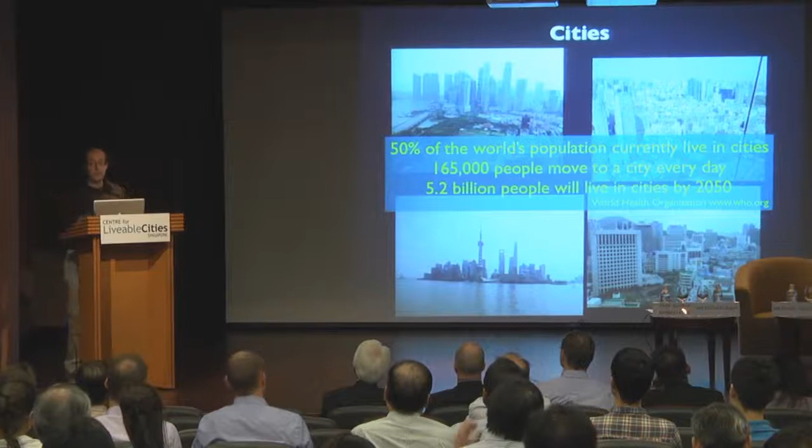That creates a lot of opportunities, of course, for growth, industrial and otherwise, that we would not have otherwise, but it also creates a lot of concerns. So I will be telling you today some ideas for how we can create technology to address this issue.

The analogy I would like to bring up is a bit of a cliche, but like every cliche, it has a bit of truth, and that is that a city is like a living organism. What does a living organism require?

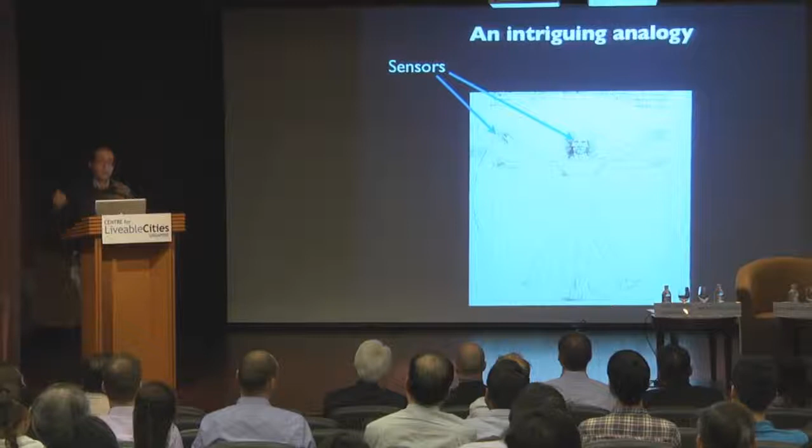Well, it requires sensors - all of us, we need to see, listen, smell our environment and so on. Then we have a number of actuators, the muscles in our body, which allow us to modify the environment and have interactions with fellow peers and other natural objects.

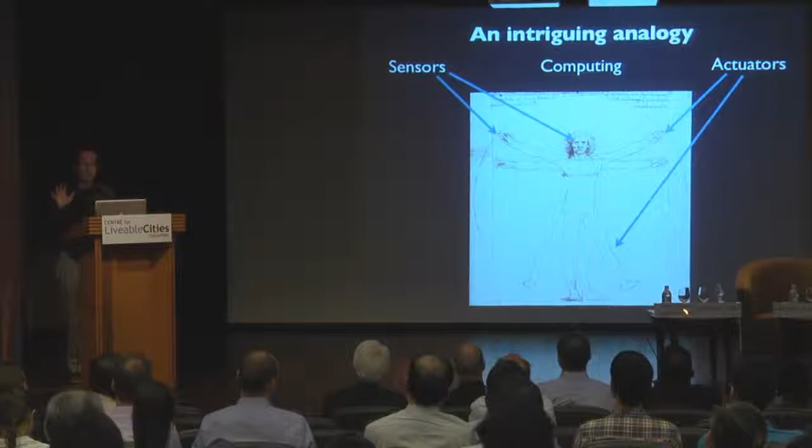And then finally we have a brain - a kind of computer which allows us to coordinate our memories and our current situation and decide how to act accordingly. Most of the time, it does not always succeed, right? But most of the time it does a good job.

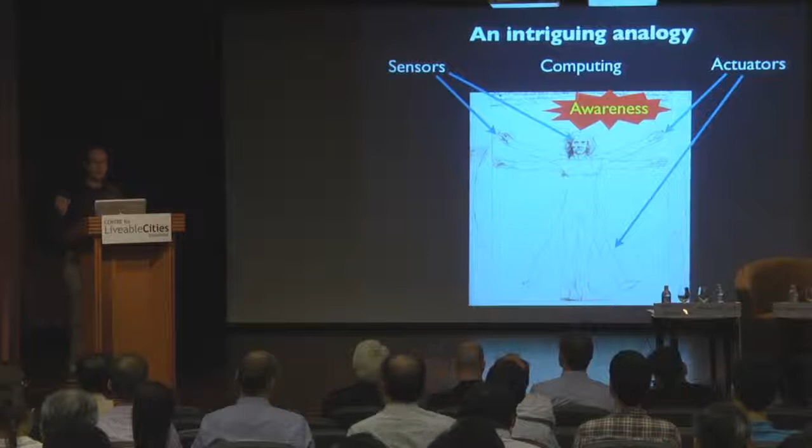And on top of that, you have to remember that we have limited resources because we cannot really compute everything. We receive a lot of inputs from our sensors, but we do not perhaps have enough computational power to deal with all of this.

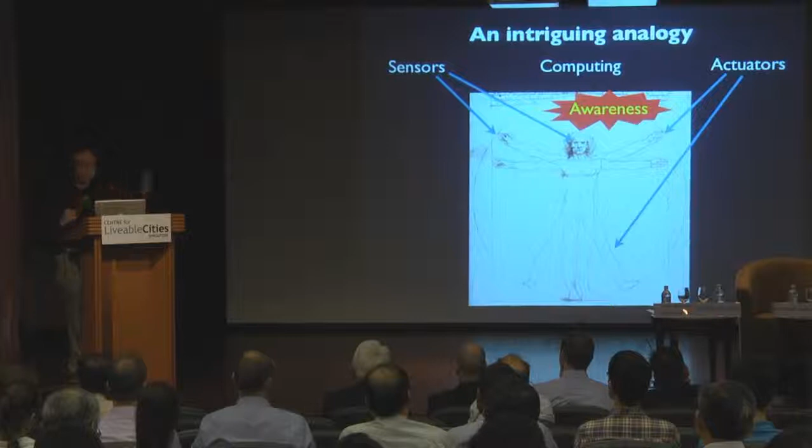Some of our actuations happen automatically, and some of them actually require the brain to happen. Sometimes you drive home from your office and remember nothing about the drive. You did it safely, followed all the rules, did not crash into other vehicles, but you remember nothing, right? That is because it was not sufficiently important to create a level of awareness. On the other hand, if someone cut you off on the way, you remember that, right?

So this is what I'm talking about. Your brain has mechanisms to allocate resources according to the current needs. It is very similar in the sense that, and of course much more complicated, it has sensors that monitor various aspects of what is happening. Some of those are related to traffic, some related to the environment, some to all kinds of things like water distribution, power, and so on.

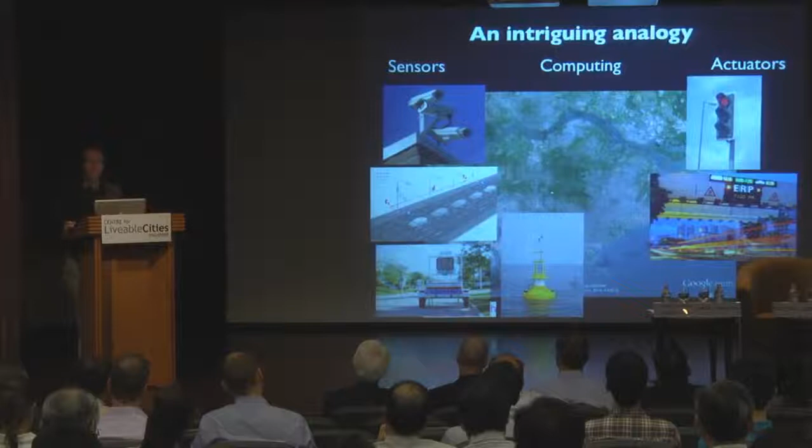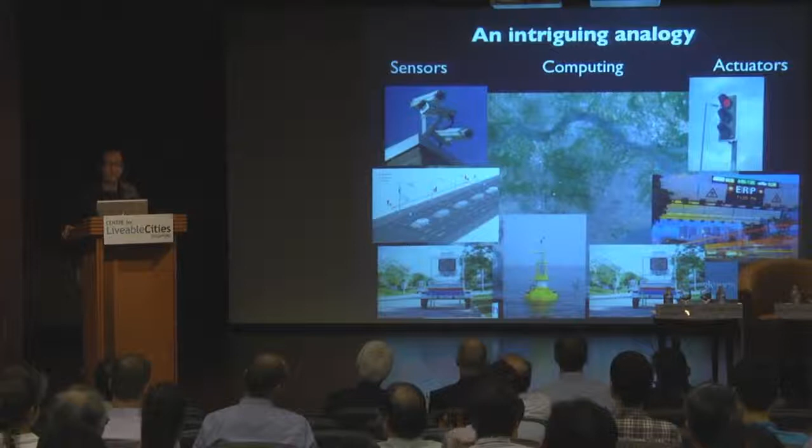The city planners also have ways to intervene with what's happening in the city. For example, a traffic light, in a way, is an actuator because it tells cars when to stop. The ERP that we have in Singapore is also an actuator because it indirectly controls traffic by making it pricier in some occasions to drive. That is one way you can limit traffic by making it expensive for people. Singapore was pioneering this, and then other cities, London and so on, adopted it. In a way, this kind of thing that measures your speed is also an actuator, because if you notice you're driving faster than the limit, it suggests there's a traffic cop nearby, so you better slow down. So there's many ways for city designers to intervene with what's happening.

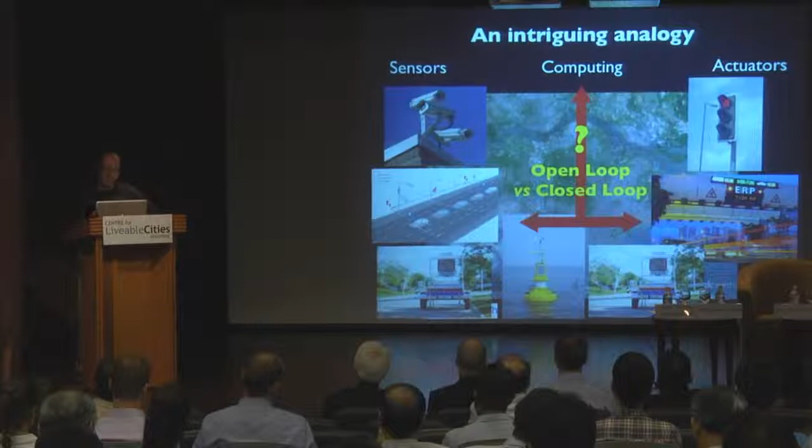What I would like to address is the issue of how you can make all of these things happen together, and this is, of course, an issue of computation. In the next few minutes, if you permit me, I will give you a very brief lecture on engineering.

A particular engineering approach is called closed-loop operation. Some of you may use it in everyday life, but I will make it a little more specific. In engineering, we always deal with systems. You can think of your body as a system, you can think of the city as a system, you can think of simpler things like your air conditioner at home as a system too. So what is a system? It is something that requires an input, and then it has a set of rules, and the output comes out as a result of the transformations that the rules apply on the input.

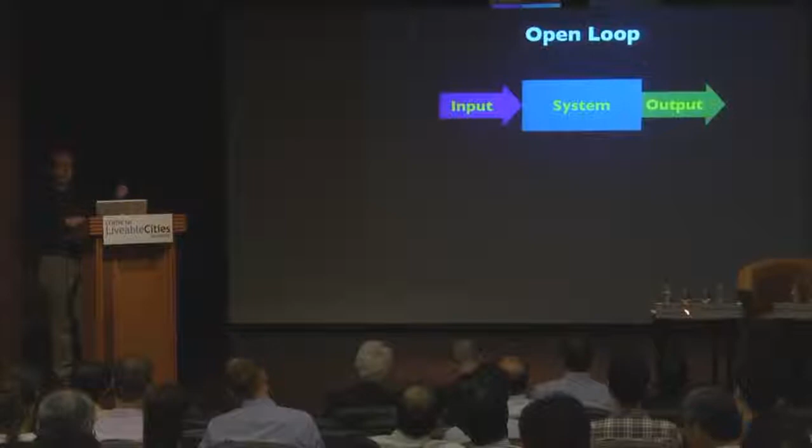When you have a system like this, where an input goes in and an output comes out, you call it open loop. An example is the toaster oven: you turn on the switch, the toaster oven has a timer, and then finally it says, okay, I'm done. The same is true of traffic lights — they operate on a timer, but they do not have a more intelligent way to interact with the output. So when the toaster oven is done, it has no way to know if the bagel has been overcooked or if it has not been cooked correctly. It just doesn't know. This is what we call an open loop system. It is cheap, and in many cases it works, but it is not always producing the desired results.

A better way to design systems, I would argue, is to do what is called a closed loop. A closed loop system is structured a little differently — you do not give it an input per se, you tell the system what you want the output to be. You want the bagel to be toasted at the appropriate level, for example, or you want the traffic in the city to be at an appropriate level, and anything that deviates from that level you do not find acceptable. This is your desired output, which you can think of as the input in this system configuration. Then you have another block here that is a sensor — it measures what the output is.

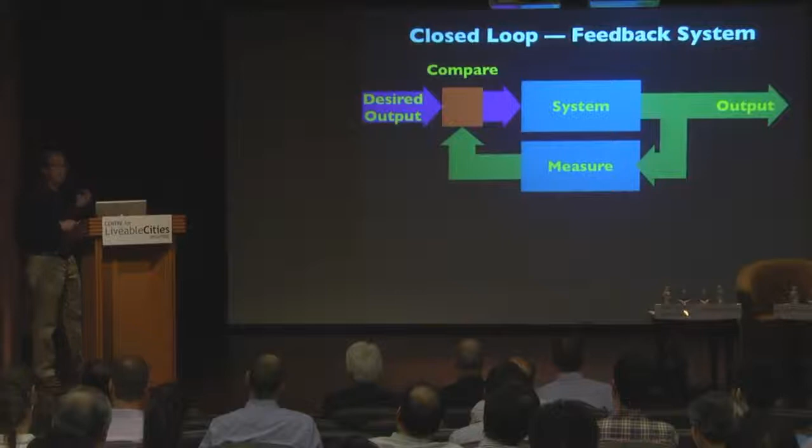And then what you do is you take the actual output of the system, you compare it somehow with the desired output, and then you tell the system how far am I from this desired output. If I am at the desired output, then you don't have to do anything, right? That's very cheap, because then you can coast and you are expending no energy. If you are far from the desired output, then you have to expend some effort in order to get closer. That is the idea of a feedback system.

And of course, there's a lot of mathematics and implementation details that go into it, which I will spare you. I'm not going to show a single equation. The air conditioner is a classic example of a feedback system because it does measure the temperature. So you set a desired temperature, and the air conditioner tries to match it.

That's the idea. The ERP is also a feedback system because the ERP sets the price, as far as I know - perhaps someone from the LTA can correct me - but the ERP actually takes the current state of traffic into account. If it is reaching a level that is perceived as too much, it will raise the price of the toll, so presumably some people will be discouraged, and therefore you can control traffic this way. So it is a form of feedback.

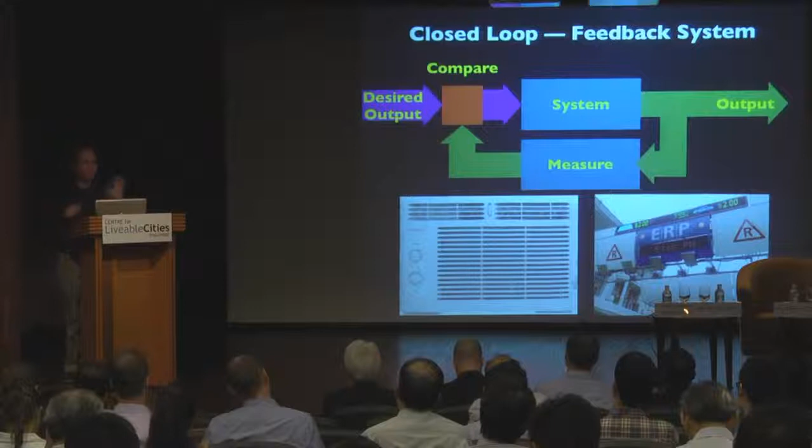Now, the thing I would like to spend some time discussing more here is the aspect of measurement. As you can imagine, it is critical to take measurements that meet certain requirements. They have to be comprehensive, real-time, and accurate so that you can operate this loop. If you fail to meet those requirements, this thing will not work very well.

So, as I mentioned, the city has a lot of conventional sensors - cameras, speed sensors that people install under the asphalt in the road, and buoys that measure quantities related to water, such as wind, temperature, salinity, and so on. Sometimes these are enough, sometimes they're not enough, and then you have to go and use unconventional sensors.

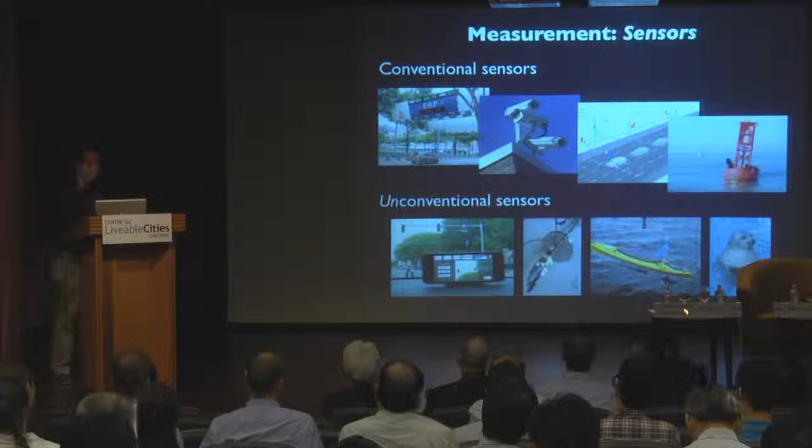So I will show you examples where your iPhone can actually act as a sensor that informs the city about what's going on. I will show you examples of sensors that measure quantities related to the water distribution network. We use autonomous kayaks, kind of like drones that operate in water, in order to measure what's happening in water. And in some cases - okay, we are not really using animals, this is not what I'm trying to imply here - but we can certainly get a lot of inspiration from animals about how they sense things.

Some of my colleagues - I won't have time to talk in detail, but it turns out the whiskers of a seal are very clever sensors. Some of my colleagues, including some students here, try to emulate this - they try to create artificial whiskers that can allow you to sense the environment.

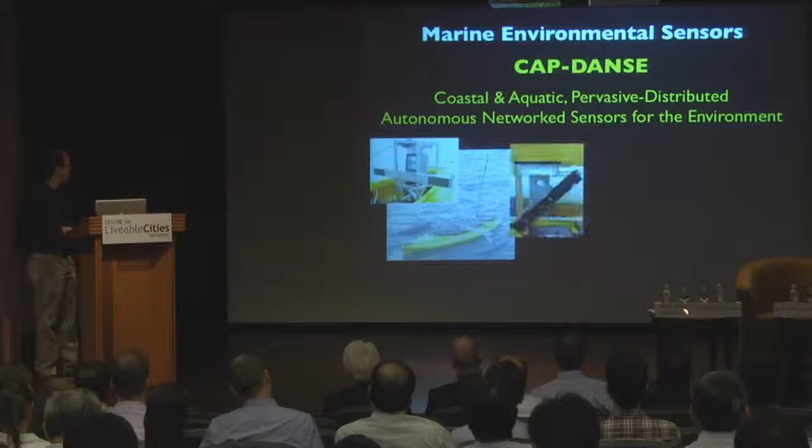Let me show you a few examples. We have a project in my organization at MIT where we have created a fleet of autonomous vehicles that carry sensors. These vehicles are of various kinds. Some of them are kayaks, so they operate on the surface of the water. Some of them are basically submarines that go underwater, but they still operate completely autonomously.

And some of them are flying vehicles - think of them like miniature helicopters. Technically, they are what we call quadrotors. All of these vehicles carry various kinds of sensors, and not only that, but they operate in harmony and coordination. They talk to each other by various means - Wi-Fi, though the vehicle that goes underwater obviously cannot use Wi-Fi, so it uses sonar and acoustic communication. So they all talk together in order to achieve a certain goal.

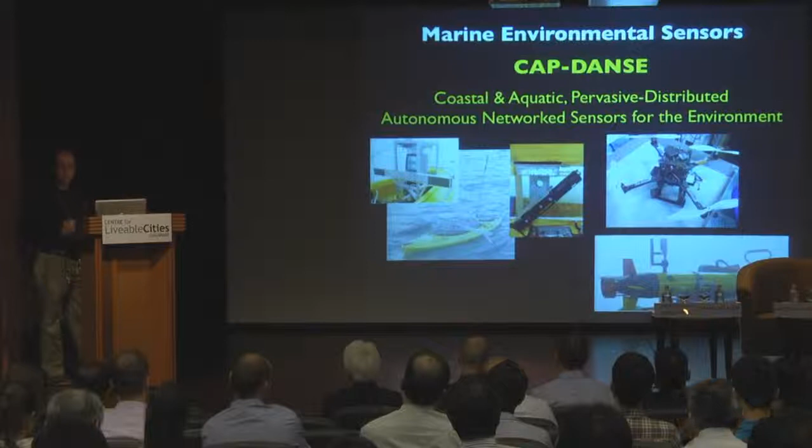So I'll show you what we can do as an example with these kinds of sensors. We can address an issue that is very important for the Singapore environment: the occurrence of harmful algal blooms, which have created major disasters in previous years for fisheries and so on. It's actually a mystery how these blooms occur and what is really causing them. As it happens, they occur at particular times during the year, typically at the end of January and also in midsummer.

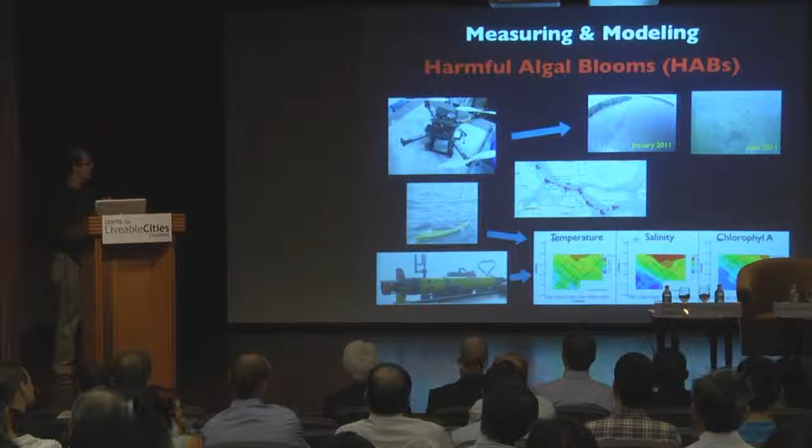So what we can do is plan the sorties, the missions of this autonomous fleet, to occur with the expected occurrence of algal blooms. We can detect the bloom very fast because these vehicles carry cameras. If the water develops red patches, we know this is happening. These are examples of pictures we took on two separate occasions where an algal bloom was just starting, and our vehicles detected it.

This vehicle cooperates with vehicles on the surface and underwater, which measure different qualities of the water. We have sensors that measure temperature, salinity, chlorophyll, and other things. Colleagues at the National University of Singapore put all of this together in a model that also accounts for weather and other environmental conditions to try to predict blooms. I won't say we've solved it yet, but we're making rapid progress, because for the first time anywhere in the world we have real data correlating physical quantities about the environment with the actual occurrence of this destructive phenomenon.

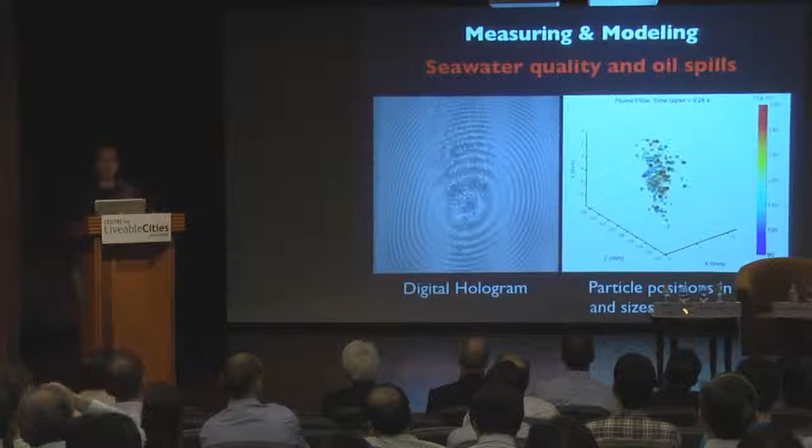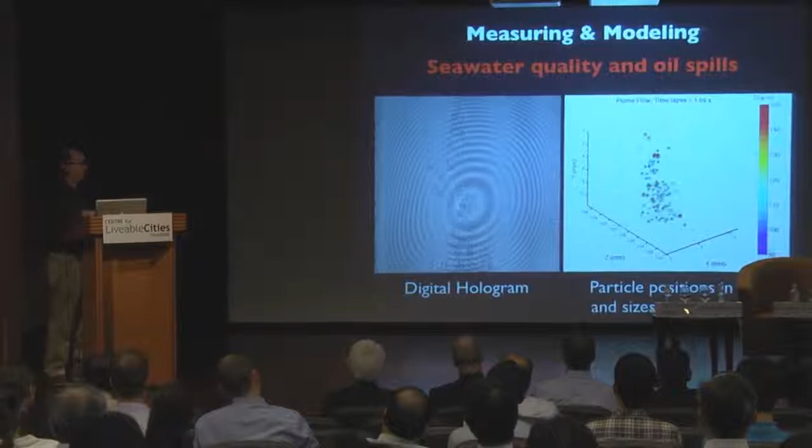So this is an example of what unconventional sensors can do. Another thing we do is use sensors that measure particle or bubble concentrations in water. This happens to be my own area of expertise, where we capture images like this with what is now a standard camera, but we apply signal processing that lets us reconstruct the positions and sizes of these bubbles in three dimensions. These are very important.

I'll spare you some details, but colleagues who understand fluid mechanics can put this data into their models and create useful predictions related to oil spills, land reclamation, safety, and so on.

For example, we can help scientists determine the proper way to deal with an oil spill. There's a controversy: if a spill happens, should you contain it with a boom, or use a surfactant to disperse it and hope organisms in the sea will eat the leaked gasoline? It's actually not clear to scientists what the best approach is, but by creating this rich data, we can help them address the issue.

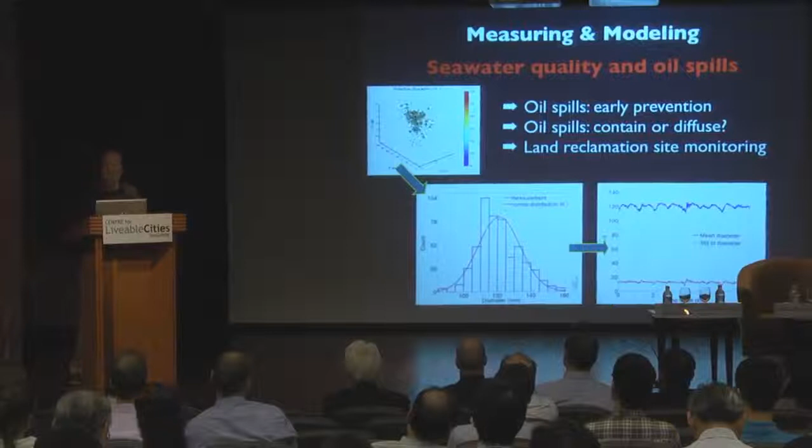I'll show you two more examples, and then I'll conclude so my colleagues can take their turn.

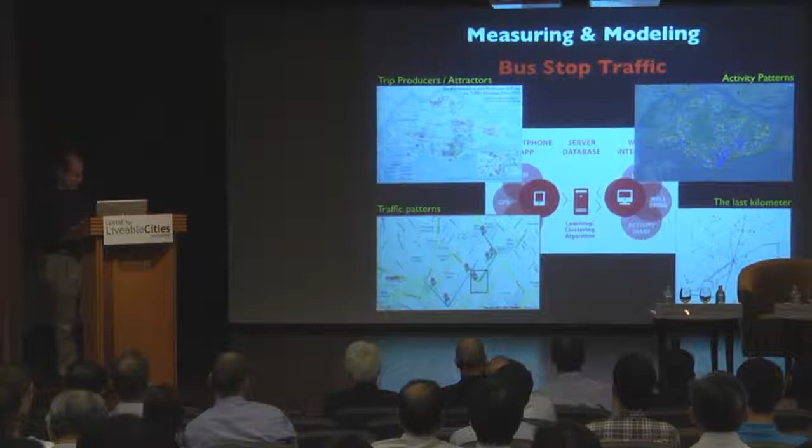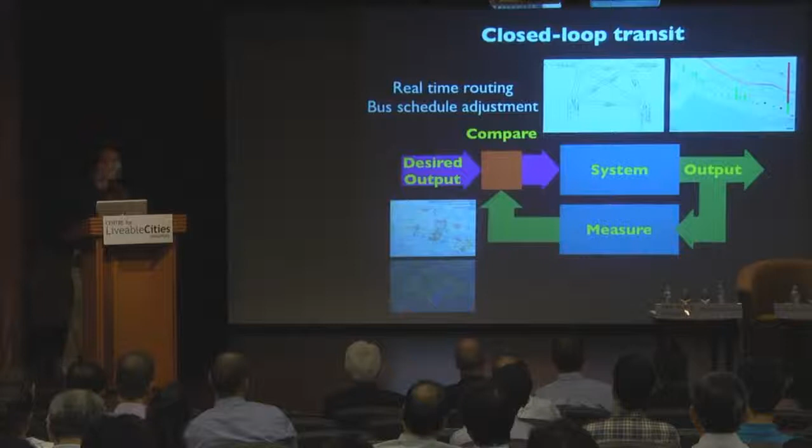One example is using smartphones to measure traffic in the city. Your smartphone can communicate by Wi-Fi with other smartphones, and from that you can create patterns of concentration of people at bus stops, on buses, and at various other places in the city. Then you can build patterns of activity in the city and use them in the feedback loop I described before, for example to adjust transportation patterns, control traffic lights, or control where buses go.

I'm not saying this is happening now, but these technologies can enable it, and it might happen in the next few years. Once you can do that, you can decide how to adapt, for example how quickly you can change the route or schedule of a particular transportation mode.

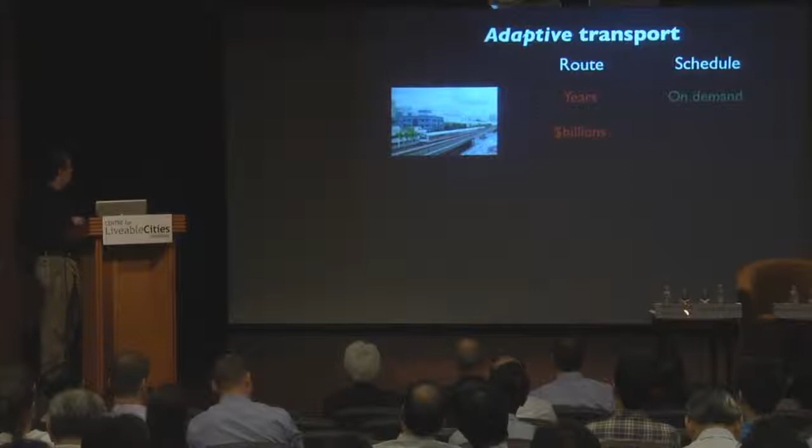Changing a train route isn't easy; it costs billions of dollars and years to build a new train line. But since trains run on tracks, they aren't affected by traffic, so it's actually quite easy to send trains to a particular hotspot, provided you don't crash into other trains. In places like Tokyo there are express tracks where trains can go very fast. We don't have those in Singapore, but we can still manage quite a bit even with this limitation.

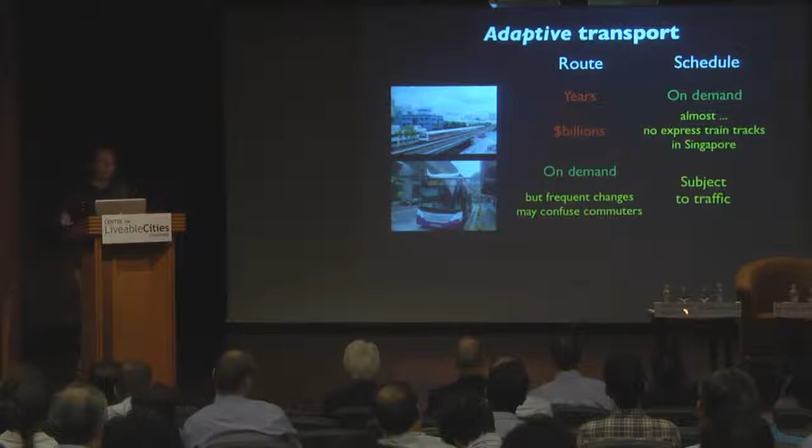Buses, on the other hand, are the opposite. It costs nothing to reroute a bus, provided you can inform customers so they aren't surprised by the new route.

But of course, the bus is subject to traffic, so it can get stuck, unlike the train. And then finally, many of my colleagues, and one of the following speakers, will actually talk about autonomous cars. This is a very big deal in Singapore and elsewhere in the world. It is not my expertise, so I will leave it to my colleagues to tell you more.

But it is a very interesting way to deal with it, because you can deploy autonomous cars on demand if you have them. And also, even though they're subject to traffic, they can be programmed very efficiently, so they can avoid the traffic hotspots, and instead of making traffic worse, they can actually alleviate the traffic problem. This is the promise of autonomous vehicles.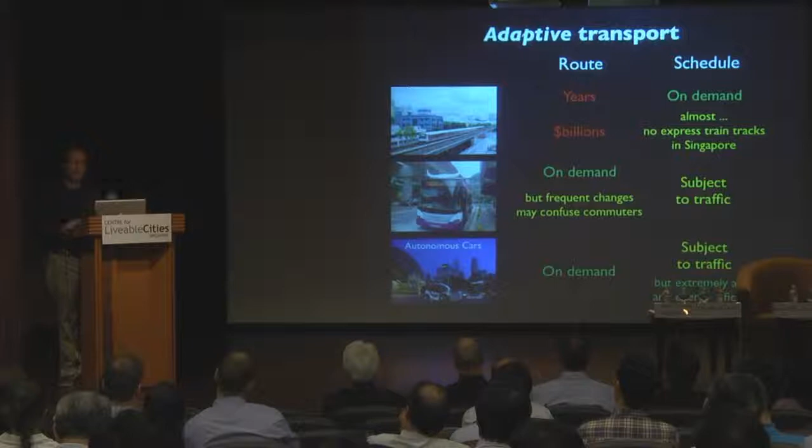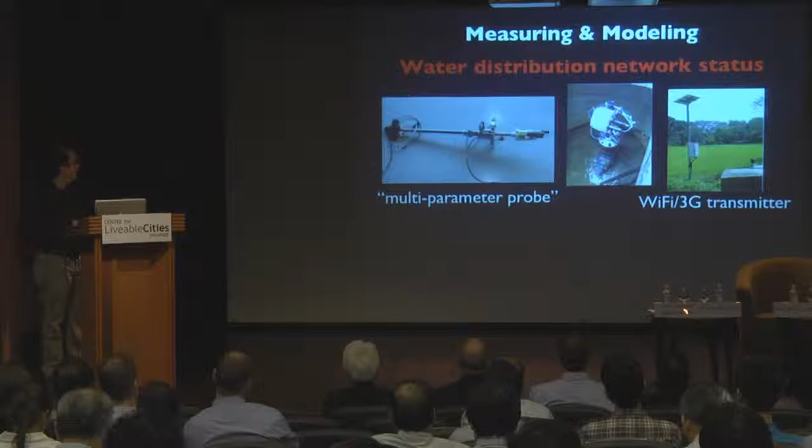The last thing I want to tell you is a topic very, very dear to Singapore, because water is a very scarce resource and extremely crucial for Singapore as a nation, and that has to do with monitoring the state of the water network. I'm already over time, so I don't want to abuse my stage privilege here. I will just tell you that some of my colleagues have developed a network of sensors, and they've deployed it in the pipes of the water distribution, and based on that they can monitor the water flow.

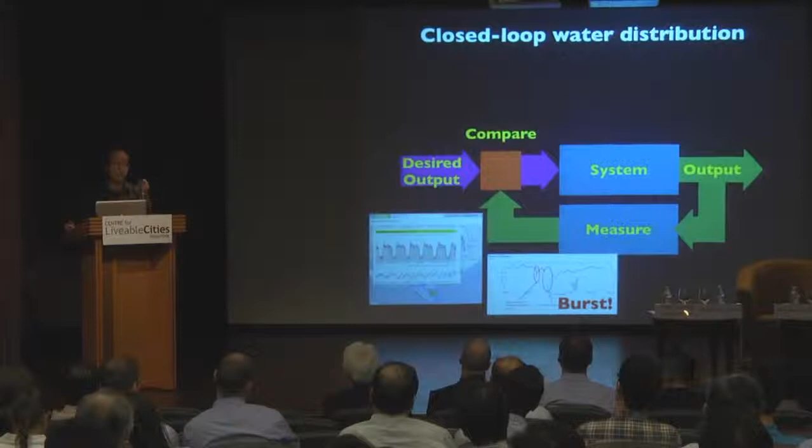They can also predict events such as bursts, or detect them very quickly after they happen. Based on that, they can deploy either crews to fix the problem, or in a more automated fashion they can adjust the water flow in order to cope with a particular situation, whether it is increased demand due to F1 traffic or what have you.

These guys have actually started a company that is commercially deploying this technology now in Singapore. The company is Singapore based, and they will deploy the technology in Singapore first, but obviously possibilities outside Singapore also exist.

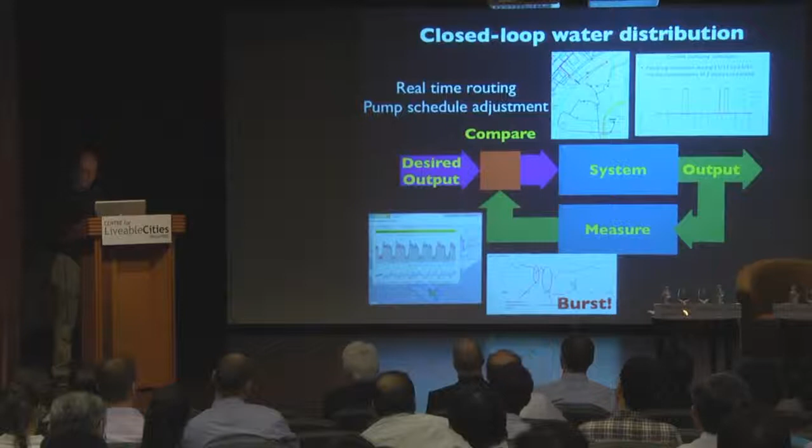So finally, what I would like to say is that feedback is a very interesting and promising way to run the city, and I would like to suggest that it is a very productive way to plan for the future of Singapore in the next decades to come. So maybe I will stop here and pass the podium to the next speaker. Thank you.

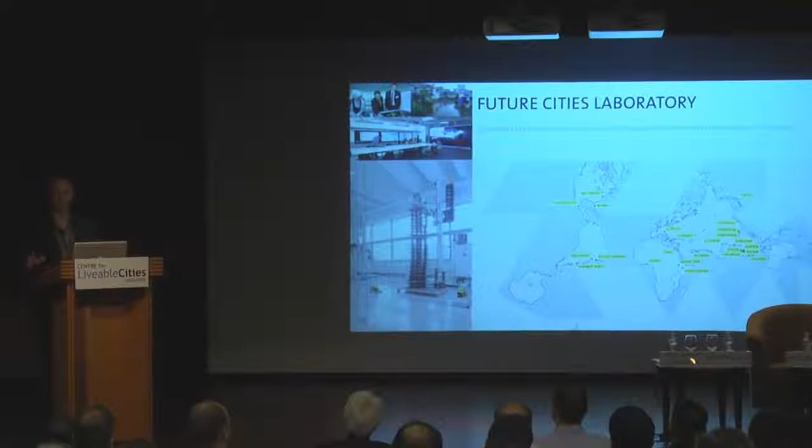Our team is embedded into the Future Cities Laboratory. The Future Cities Laboratory is the first project run by the Singapore-ETH Center. ETH is a Swiss university from Zurich, and this university, the Swiss Federal Institute of Technology, together with the National Research Foundation in Singapore, funds this project. Our work is embedded in a quite large field of research. When we talk about Future Cities Laboratory, we talk in fact about 13 different groups, and I'm representing one of them.

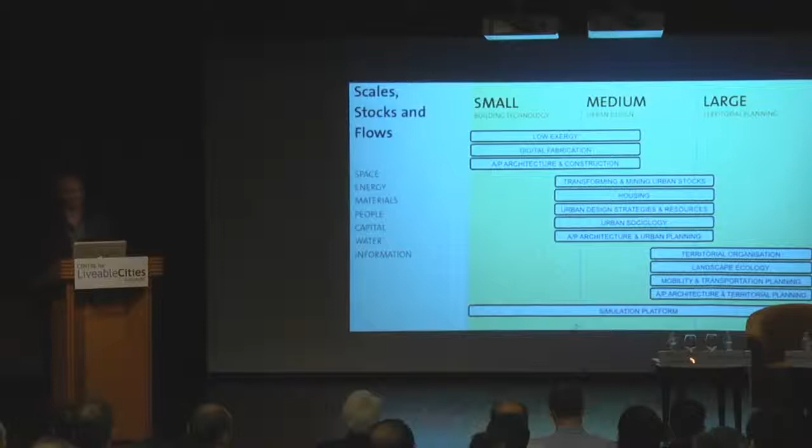So when we look at cities, we look at 3 different scales. We look from a very large perspective, which deals with territorial organization, landscape ecology, and also mobility and transport. On the medium scale, we would talk about urban sociology, about architecture and urban planning. And on the small scale, we're dealing with low exergy, energy design, architecture and construction, and coming to our project, digital fabrication and architecture.

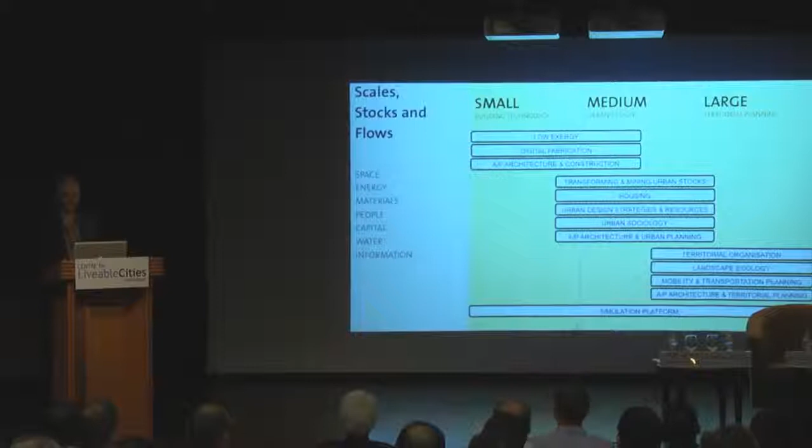So our team here in Singapore consists of 6 permanent researchers and 2 principal investigators coming in and out. We do research on PhD level, and also we work with master students in architecture in a design studio.

So what are we challenging? We're challenging two main topics. One is we're challenging the typology of high-rises.

We use the architectural typology of a high-rise as a test case for our research, for several reasons. One, it's a very apparent typology in Southeast Asia. Singapore, for example, is ranked number 4 worldwide in number of high-rises. And what cities usually communicate is a picture, like what you see right now on the screen, of diversity in design.

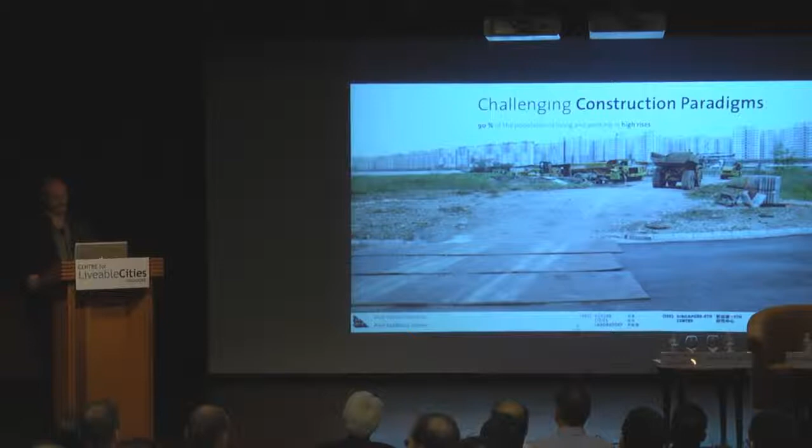What we also want to challenge is the construction paradigms behind these typologies. Again, in Singapore, 90% of the population is living and working in high-rises, and the reality if you look at cities from the backside is very much different from what is communicated. The variety is a bit more limited due to several reasons, one of which is that the current construction paradigms in the building industry are still very much rooted in an industrial age.

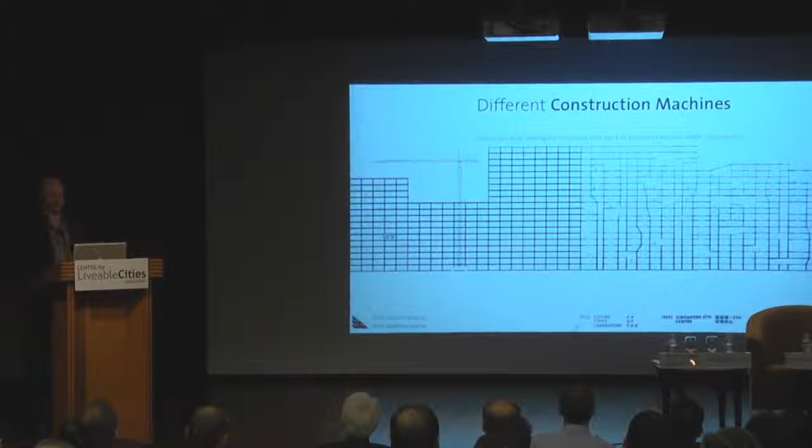There are actually two examples here in Singapore. One is the HDB hub in Toa Payoh, as far as I know, which was constructed with such a technology. So we're looking at different construction machines. On the left side you see a conventional construction machine lifting very large and heavy pieces. On the right side is somehow an illustration of what we try to perceive for the future of construction.

Now, about 7 to 8 years ago, our team implemented this robotic arm into an architectural laboratory. By doing that, it was actually the first team worldwide to start looking at robotic technologies and how to make use of them in an architectural and design environment.

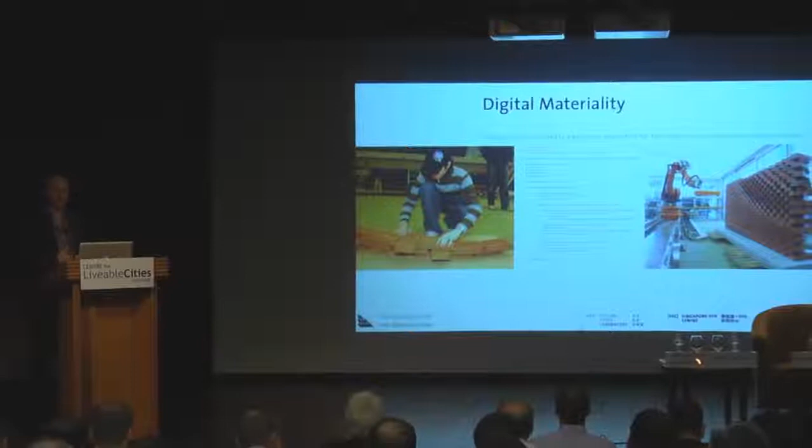What it really means for us is the following. If you think about how buildings are constructed, we like to take the brick wall as one of the examples, for several reasons. One is that the brick is one of the oldest building components available, and another reason is how you can handle it—you can handle it manually, but you can also test how to handle it with a robot.

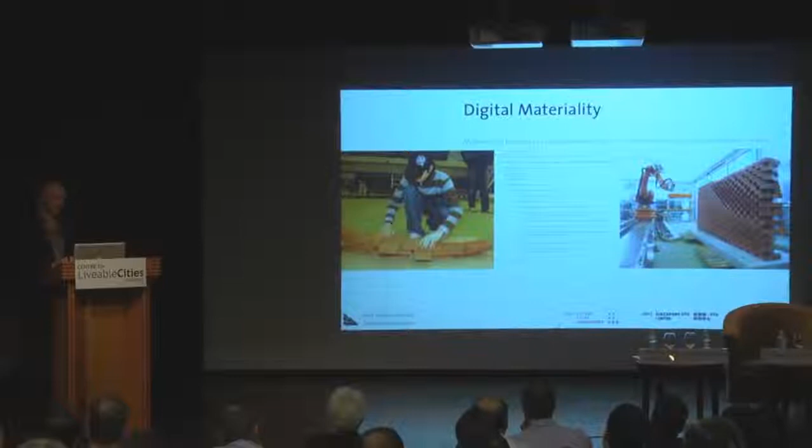On the left side you see a student several years ago trying to figure out what possible configurations you could build with bricks. And in order to control a robot, you need to translate this logic into a code, a little programming code, and then you can program the robot.

The interesting thing about the robot is when you look at this brick wall as one of the key examples—everyone is able to imagine how a normal brick wall looks, and you could probably imagine it's possible to build something like this by hand. But if you think about what it implies, you start realizing how difficult it really would be, and that it would not be feasible at all. The robot, on the other hand, does not mind doing the same procedure repetitively, but it can actually change that from step to step, which is why you can position each brick in slightly different rotations.

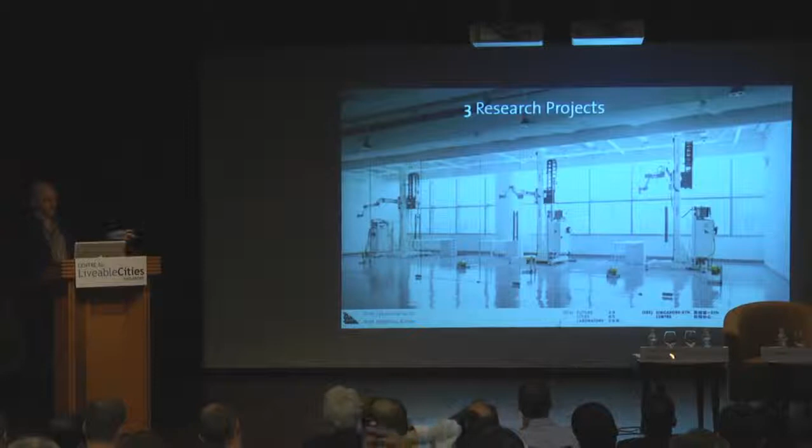So to conclude, as I said, I want to show 3 research projects that we are currently working on. This is our research laboratory here in Singapore. We are based on the NUS campus in the Create Tower, and we're working with these 3 robots which allow us to work on scaled models, and also allows us to look at one-to-one applications, so small one-to-one applications.

One of them is a very short-term research project that we're currently working on. It deals with the process of tiling. Tiling is very labor-intensive, and after several conversations with Singapore agencies, we identified this as one potential application which should be able to be done in a rather short-term period. So again, we try to bring in a small machine which is able to actually go into rooms and lay tiles.

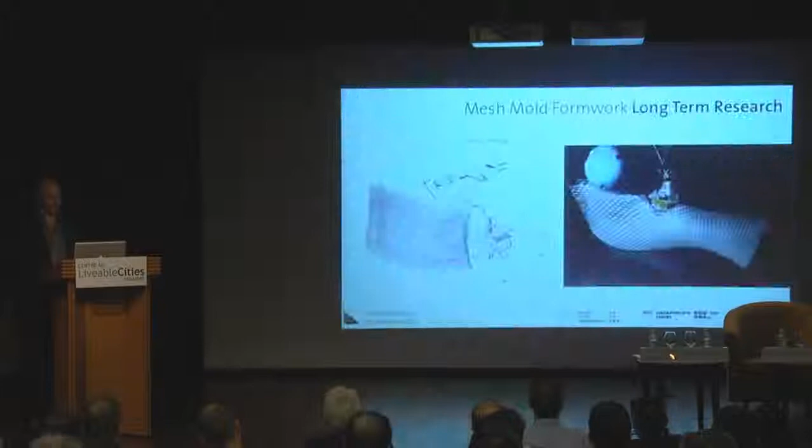The second project that I would like to highlight is called Mesh Mold Formwork. This is more long-term research. We've all been confronted recently with this hype about 3D printing technologies, and of course this promises to be a very potential technology for many industries, but it's questionable how it can be applied to architecture.

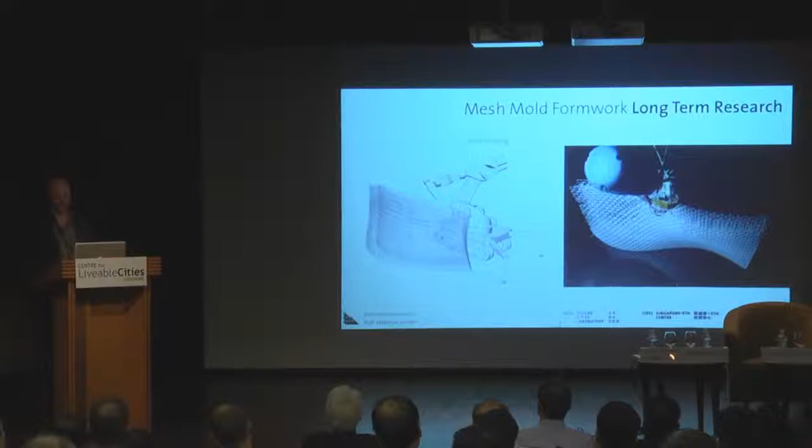But nevertheless, we were curious about it, and we dismantled a 3D printer and used it actually in a way to extrude plastic material in space. It's not a brand new concept, but in the way we applied it, it is new - nobody has thought about it in that way. So we can create these 3D meshes which can become the size of a wall.

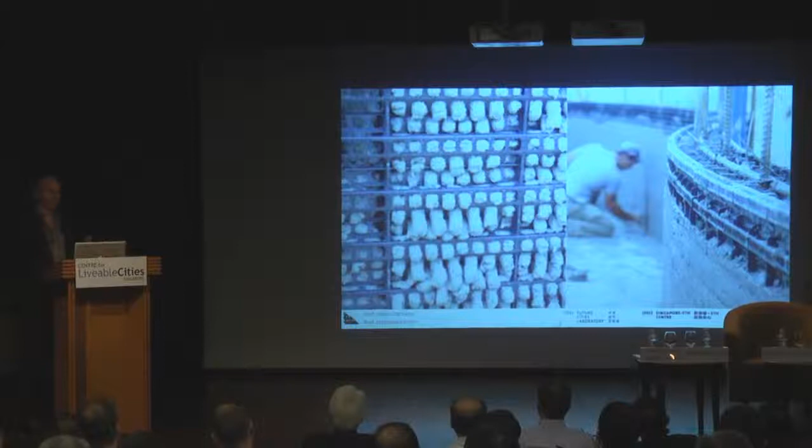And what does this mean now? This is not the wall itself, of course, but there is a technology called leaking formwork. So you can build these formwork systems, these perforated formwork systems out of plastic, and then pour not-so-liquid concrete into it. It protrudes the surface, and then you can trowel it, and you have a perfect concrete wall.

So this is a very interesting concept that we apply here. And what we do here is we use the potential of the robot to move without any constraints in space. We don't do it by moving large pieces, because this would be difficult for robots, but we do it by small pieces that actually inform the concrete.

Since concrete has this liquid state, it can be formed in almost any shape, but it would be very difficult to do because you need a lot of effort to go into the formwork. So here you see the formwork, you see the reinforcement which is inside, and we are now trying to fold this into one process by making this formwork built by the robot, and by also activating it as the reinforcement.

So here you see a small 1:5 scale example. This is the first proof of concept that it can work, and how it can actually work.

And then as a last project, I would like to just give you a very brief insight into the methodology behind it.

So it's not only about applying the technologies, but it's also about how we change our way of working with these machines. Here we work with more than 20 master students from ETH Zurich and from NUS Singapore together. In this studio, called Design of Fabricated High-Rises, we ask our students to build 1 to 50 scaled models. A 1 to 50 scaled model of a high-rise quickly becomes more than 2 meters high, almost in some cases up to 4 meters high.

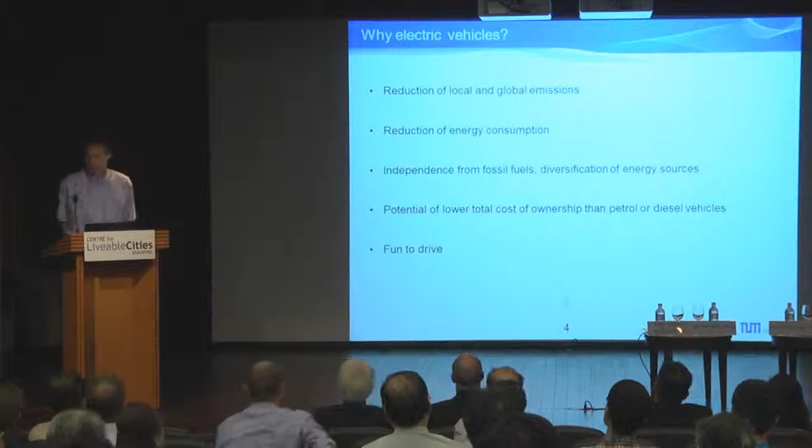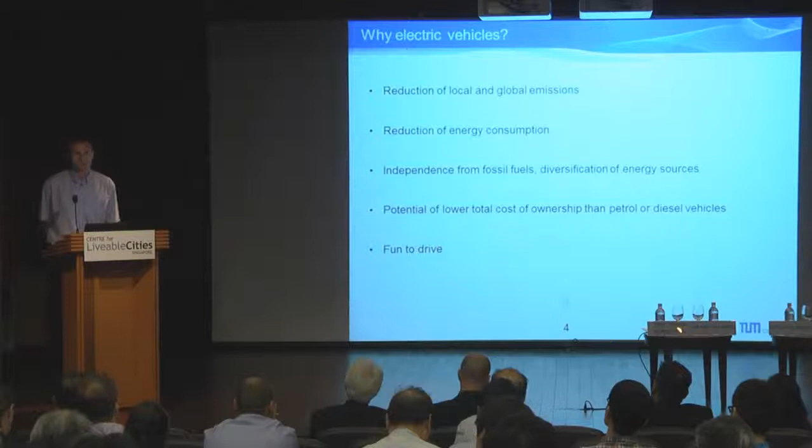In general, people will ask, okay, why electric cars? Is it a hype, or is it sustainability? We believe yes, in the long term it will be a solution for the future, mainly for cities, for megacities. There are a lot of reasons, I don't want to go through this, but it makes sense long term. It's questionable if it will have success in the next 5 years, next 2 years, but long term we are pretty convinced it will be.

Let's start about VOI, which stands for elephant, by the way, in Vietnamese - safe, not heavy, safe transporting. It's thought as a scooter for traffic congested megacities, so in fact not for Singapore, but for more developing megacities like Bangkok, Jakarta.

Imagine the following situation: you have a lot of traffic jam, but at the same time you would like to go very fast from A to B. More or less you have 2 options if you don't have a helicopter - either take a car, be it a taxi or a private car, or you take a scooter. But both have their advantages and disadvantages. A car is safe, comfortable, but you easily get stuck in traffic.

A two-wheeler is quite fast, it can weave through traffic, but it's not comfortable, not safe, and not protected from weather. So we thought, can we combine the two advantages and leave out the disadvantages? We came up with a concept actually originating from a priest in Germany, not an engineer or designer, and he approached us to see if we could make it reality. The idea is to have a passenger in a safe capsule in the front where he has a good view, and the driver is in the rear.

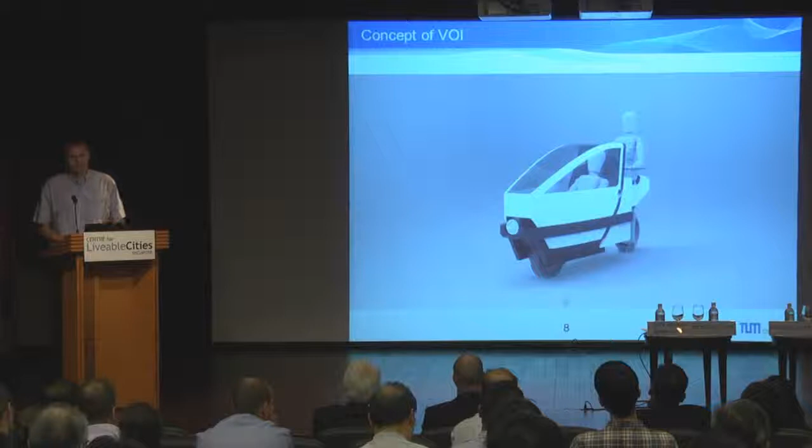As we didn't want to do something only in virtual reality, we also proved this is actually doable. A team of six master and bachelor students, shared between Singapore and Germany, built this in a time of not even seven months. I only have a fraction of the video due to limited time, but as you can see, it's really working.

It's a very first prototype, so there's definitely still room for improvement. We still haven't implemented air conditioning in this—that's the second stage we want to achieve.

The guys really had fun with this. I was already asked about it before: we actually had an offer from an investor to bring this to market. However, that means really going into production, dealing with liability issues, etc., where I think we at TUM CREATE wouldn't be able to manage alone. So in fact, we would also need real engineering effort, engineering companies, not only investors, to take the next step.

The second vehicle, by far the largest project we are running here, involves roughly 30 PhD students and young professionals, plus again roughly 30 master's, bachelor's students and interns on this project. It's called EVA—it doesn't stand for anything, it's just called EVA—and this is a taxi for Singapore. Our target was to showcase something realistic, with maybe a 5-year lead time for serious production, to achieve something valuable for Singapore.

So why a taxi? I can explain more later, but the main argument is it has a very strong leverage effect. Taxis only amount to not even 3% of vehicles in Singapore, but account for more than 15% of the mileage. So exchanging every diesel and natural gas driven car for electric could dramatically reduce local and global emissions.

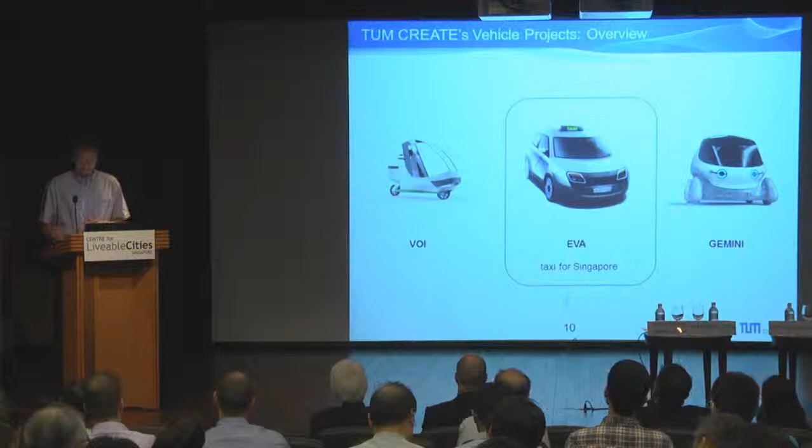The main feature—what can you actually do as a research entity to make something better than an OEM? We want to set a benchmark regarding comfortability and market readiness, regarding range and charging time. Price is another issue we don't tackle directly here, but this car is designed to have a range of 200 km of realistic driving—not a driving cycle, but realistic driving based on Singapore traffic, plus air conditioning switched on, plus all auxiliary systems. At the same time, we want to recharge this distance within 15 minutes. Wherever you look, this doesn't exist yet anywhere in the world.

We are also aware that we are still in the research phase. It's not a serious car—you cannot purchase this—but we try to make it as good as possible so that within a second phase of 5 years, which is common for automotive engineering, we think it could be placed on the road.

We have some more taxi-specific features. Being a young father, I wanted to do something for protecting children too, so we have a research project with a few students on an integrated child seat. As you can see, it's integrated into the front seat, which is foldable, and then flips out a small protection layer for a child.

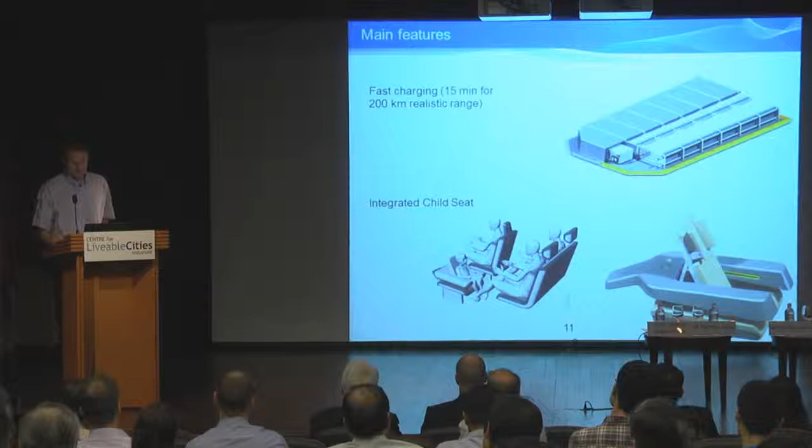It's a minimal project, but we also try to come up with a solution that reduces energy consumption while increasing comfort, mainly in thermal ways—you can really do a lot there. Just as a number, roughly, air conditioning takes about 700-800 thermal watts away constantly while driving. This number, which maybe nobody knows, is quite high compared to driving itself: if you drive a car, it's only about 3 kilowatts average here in Singapore, roughly 3-4 kilowatts on average. So it's a very high portion, and reducing this thermal takeaway from air conditioning can have a big leverage effect.

So what we target here is a more ergonomic approach, focusing on the head as the most sensitive area of the body. We try to cool mainly this area, not overcool it, so we can leave the overall cabin temperature higher, and again reduce the overall energy consumption.

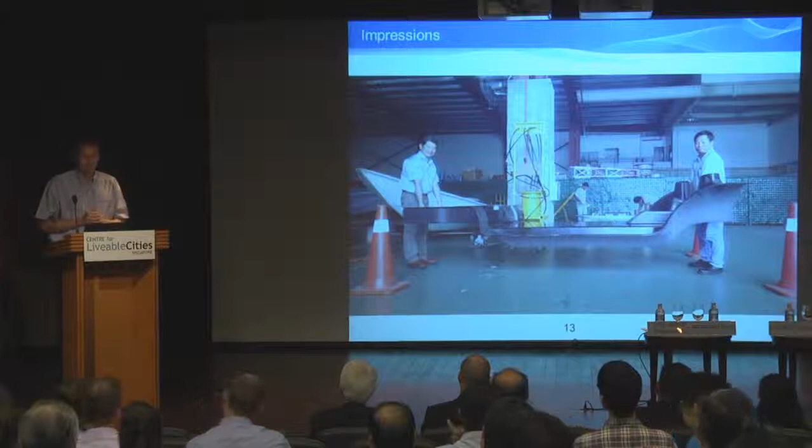I wish this whole lecture would have been a month in advance, because we are going to Tokyo Motor Show to present this vehicle, and I cannot show you the actual design right now because we will reveal it only then. But I would like to show you some work in progress and show you this car is meant to drive.

These are some very cooperative colleagues from Admiralty. The very first part we achieved is the so-called main tub, where everything else is placed on. Later on you saw a lot more parts made of carbon fiber reinforced polymers. At our second big collaborator, Hope Technik, one colleague was building up the whole body in carbon fiber. This is, as far as we know, the biggest or largest carbon monocoque in the world built here.

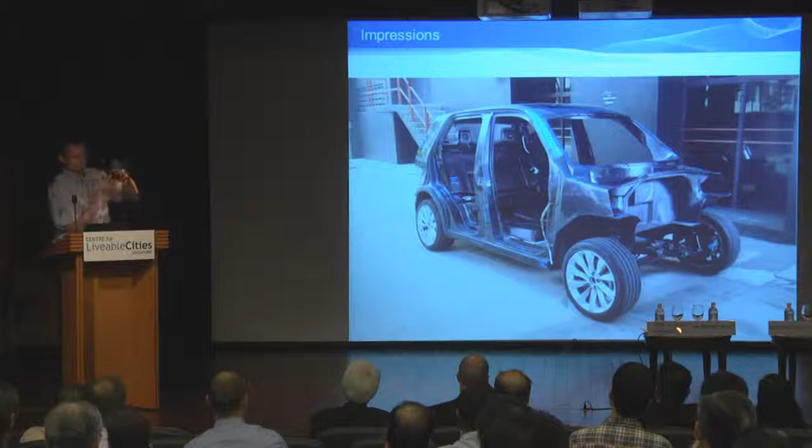This was staged roughly two months ago, where we had the first marriage of the body and the drive structure, the axle system. And the last image, still not showing the design, is from about one month ago, where we are implementing all the drivetrain systems. In not even two weeks, the vehicle will be flown to Tokyo for presenting there.

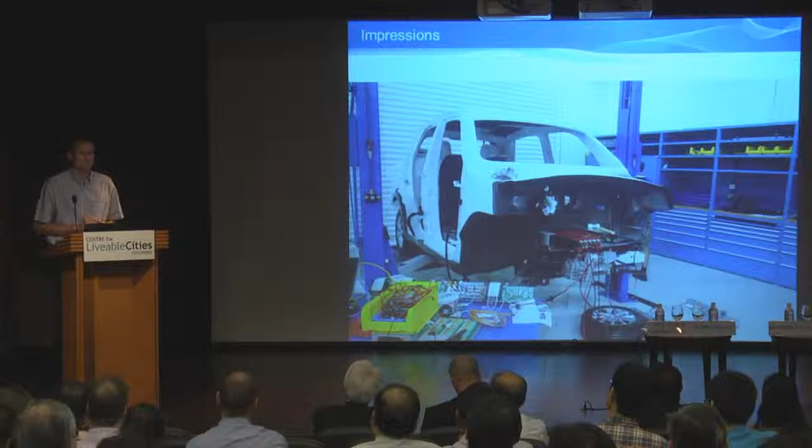So our target is to finish the car fully, of course we have to. And it is a really good surprise that we can even drive it before and show that it's working. But the actual target is to do the very first test drives in early 2014. The big event will be in not even one month from now, to showcase the ability to do this here in Singapore.

This is for me, coming from BMW, unique. We have done everything here in Singapore, 100 percent: idea, design, development, production, assembly, everything you can think about, and this is the very first time this has been done here.

I will come to the next project very quickly. This is something we think is very far in the future, where we had four master students think freely, taking away a lot of the boundary conditions that exist right now, and think about what the future would be like. What they came up with is called Gemini, a future mobility concept.

This is not something very new. It's a detachable car structure, thought to really reduce traffic on the road. If this one is only one meter long, still safe, you can save a lot of traffic again. At the same time, if you want to go at higher speeds, you would need more stability, so you would have to connect them both together.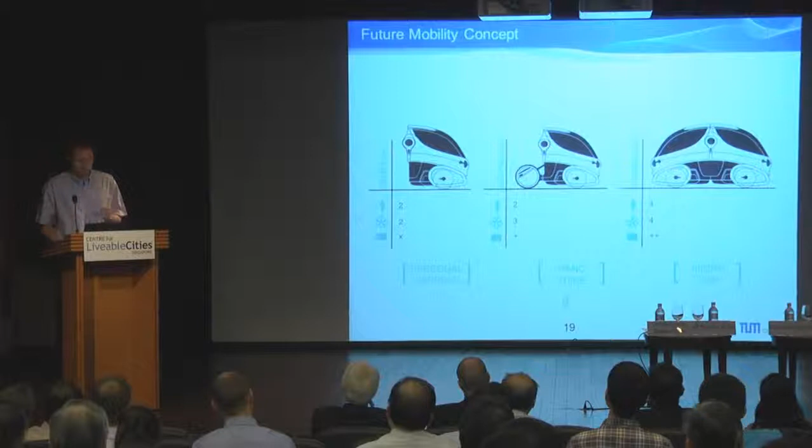We looked with one person for a year into the technology. It's not possible to do right now, pneumatic-wise, electric-wise, even mechanical-wise, it would not be automatically possible right now. I will just show you some artist impressions of how it can look like, so maybe you can see what is being thought about.

Maybe in 20 years we can think about something like that, looking very futuristic, very nice. They even have some Singaporean names, I think. And I would like to conclude my presentation with this, let's say, very far and not the most realistic view of the future. Thank you for your attention.

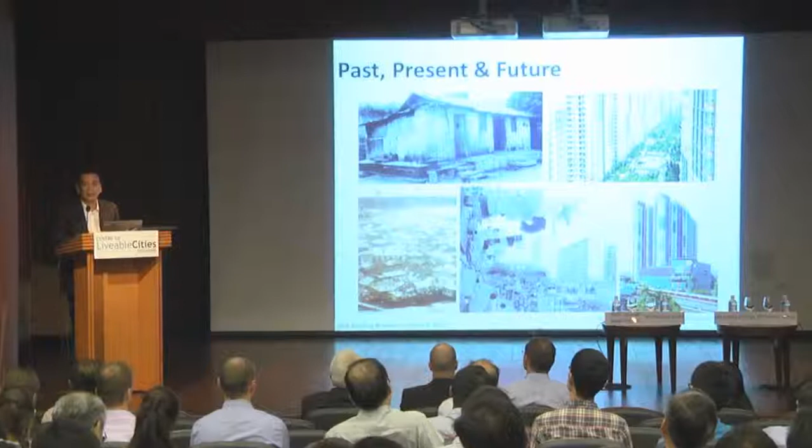For those Singaporeans and even some of our international friends, you would know the story of HDB. We were set up in the 1960s. At that time, most of the focus was housing the nation, so it's really moving people from the slums into very basic housing.

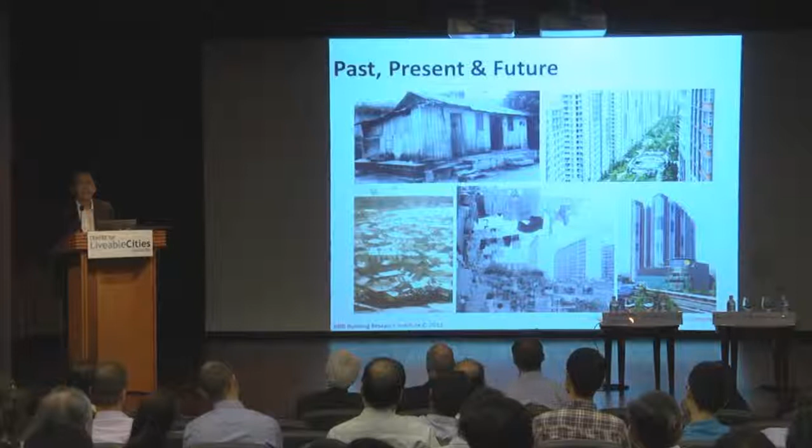But over the years, we have tried our best to improve the quality of our buildings and also the estates. In recent years, we are pushing for more sustainability, improving further the enhancement of livability, and especially now with so much ICT development, we're also trying to see whether we can drive for more smartness in our towns.

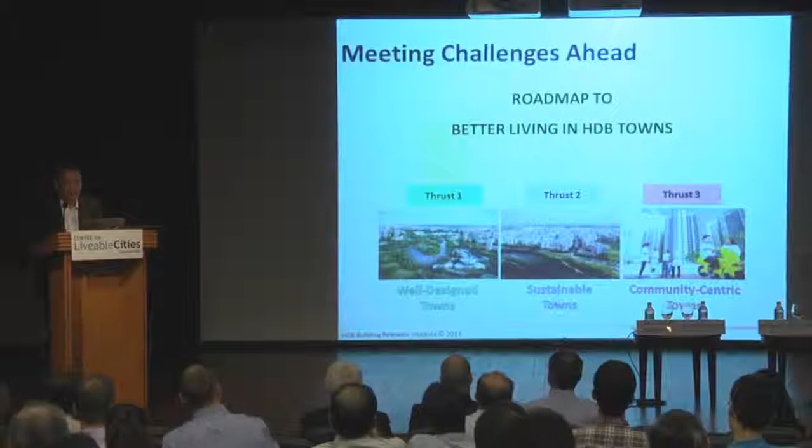So we are housing slightly more than 1 million. We have more than 1 million dwelling units now, and you appreciate that having so much development on the ground, and also managing some of this, to meet these challenges, we actually have a roadmap drawn up to ensure that we continue to deliver better living for the HDB towns.

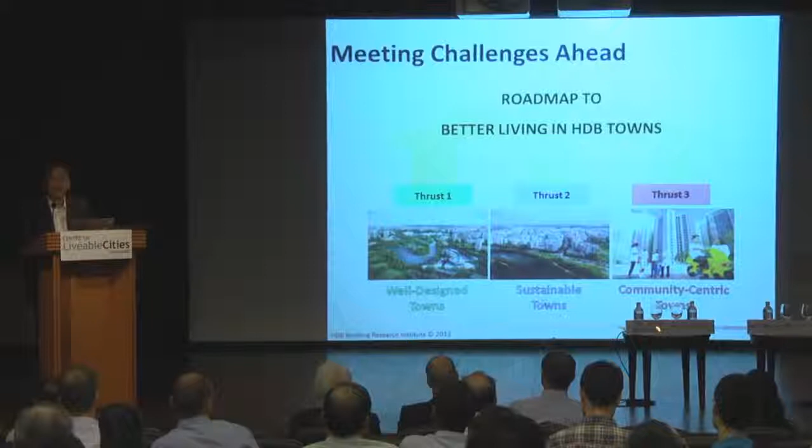We are guided by three thrusts. We strongly believe that our towns should continue to be well designed, well planned, and of course must have a strong focus on sustainability and livability. And of course, while these are the hardware, the soft aspect of it, a community-centric town, is also important, and how can we continue to drive this?

So with that, three years ago, the board felt the importance of setting up a formal research institute, and that's where I come from, the Building Research Institute, or BRI for short. We had a very ambitious vision, and that is to be the leader in housing research, innovation, and solutions for driving a sustainable living environment.

I thought this picture shows very well how we actually drive research over at HDB. Basically, we want to work very closely with research institutes from other places, whether it's private companies or even the academics, basic research or even applied research. And then we explore possibilities to enhance our buildings and estates, or even look at how to solve some of the problems that we're facing on the ground.

So when this new concept comes out, we will produce prototypes, and these prototypes will be tested in our master lab. The master lab is located in Woodlands. It's the Center of Building Research. I'll show you a bit of that later, where we conduct all these ideas in lab conditions to make sure we ensure the functionality before we identify for adoption.

That would be where the pilot test and the test bedding takes place. And most of this will actually take place in what we like to call nowadays the live-in labs. We have identified precincts or even whole towns as some of our live-in labs.

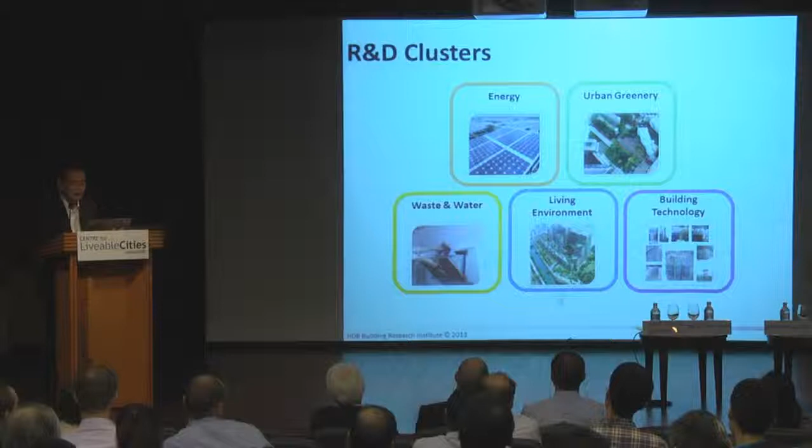So this sums up, and I think like most research institutes, we cannot do everything, so we try to focus on some key clusters that we drive: energy, very important, urban greenery, waste and water, living environment, and of course building technology.

I'll go through this very quickly because I'm actually just a moderator, not going to give you a full lecture. But in energy, we have a two-pronged approach towards reducing energy consumption in our estates. The first thing, of course, is to try to reduce the energy usage — very easy, through energy efficient technologies to drive this down. And whatever energy is needed, we see if we can use clean, renewable energy.

So we also test bed on solar. For solar, our experience has been quite long. The cost was very high, and the knowledge of it was also not so sure when we first started. But I'm happy to say that we have pushed on, and recently we have seen that the price of solar has dropped, and we are actually implementing it on a very large scale in our housing estates.

Another one that we tested on energy efficiency is what we call regen lifts. This is based on the motion of the lifts - we are able to capture some of this energy and then use it. It helps reduce the energy consumption of lifts by about 20%, and this has been widely implemented in some of our towns.

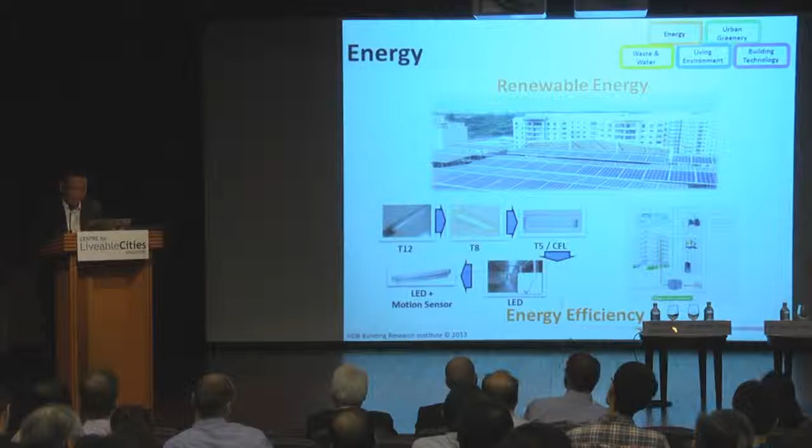For urban greenery, I think it brings down ambient temperature and improves aesthetics, so that's important. Some of the things we are testing out are vertical greening and rooftop greening. This seems simple because in other countries, especially Germany and Japan, some of this technology is already well established. We took some time here because we were a little bit careful.

A few challenges were presented to us. First, of course, is cost. The other is that the species must thrive well in our local context, so we spent a lot of time testing species to make sure they have certain properties, like being regenerative. But the most important thing is that maintenance is low, because otherwise, if it costs too much for our town councils to maintain, we get a problem when they start considering increasing the S&CC charges. So these are the challenges presented to us.

In recent years, we are now looking at biophilic towns - how to bring some of this greenery and associate it to the living conditions and health of our residents. We also have our landscape guide that helps us work with consultants and share our experience. The other area is water and waste.

Just some very quick snapshots of what we are doing - of course, water-sensitive urban design. We are doing some testing together with PUB. Rainwater harvesting - we started this back in the 1980s, but it didn't work out well because the water was not used as we hoped, and it became stagnant water, with algae growth and mosquito breeding.

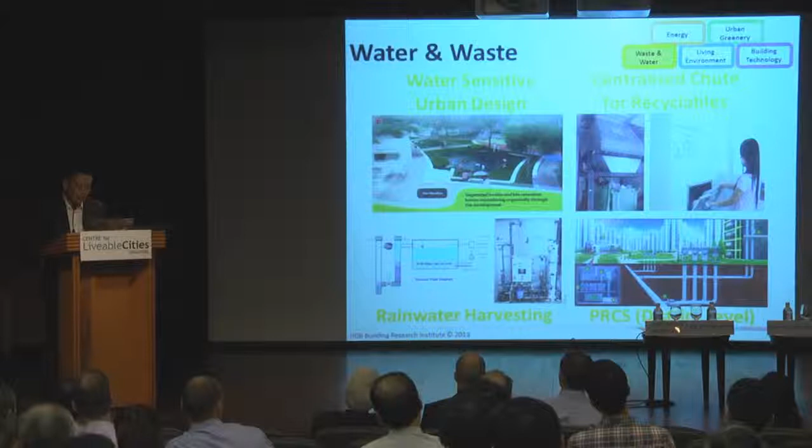The other thing we are looking at is a centralized chute for recyclables. Although it's been announced in the papers, it took us a lot of time studying just the right design to put in our buildings. Now we are going in a big way with this pneumatic refuse collection system at the district level. We find great opportunities here because that will increase the productivity of the collection process - imagine the truck, instead of going to every block, now just goes to one point where everything has been sucked into a central bin, and just collects from there.

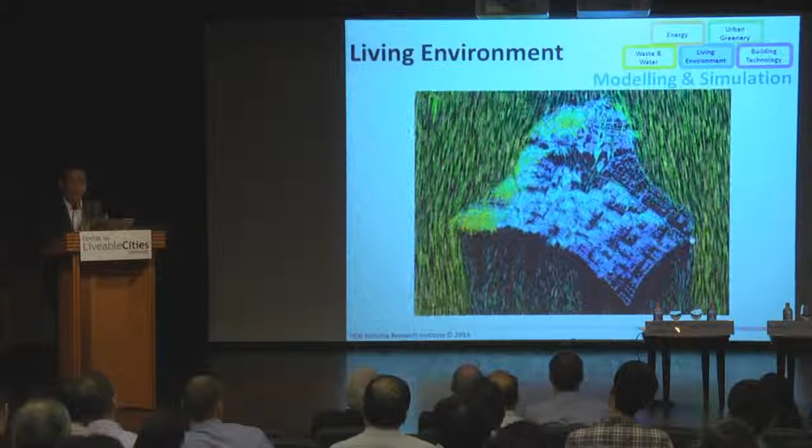The other thing, in terms of living environment, we are looking at advancements in modeling tools to see how we can use them to our advantage. We started with units, then a whole building, and now a whole town. The town you see in this animation is actually Punggol - we modeled the whole of Punggol, and that allows us, not only at the precinct level but also the whole town level, to ensure that the wind still reaches especially those existing estates at the central of Punggol. So this gives us quite good information.

So the wind map is something we have built, and we are looking across our towns. We are also doing shadow analysis, solar irradiance, thermal comfort mapping, and noise mapping. But in recent times, we are also looking at complex systems to see how we can combine all these things and justify some of the urban solutions we're going to bring in. That's something I can hopefully share with you another time.

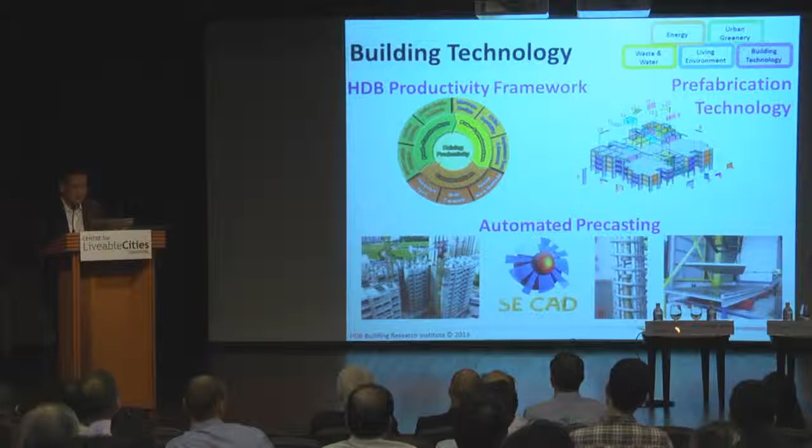Building technology - I think precast is something we are good at, and with the advancement in robotics, maybe there are opportunities to expand from it. I won't go too deep into it.